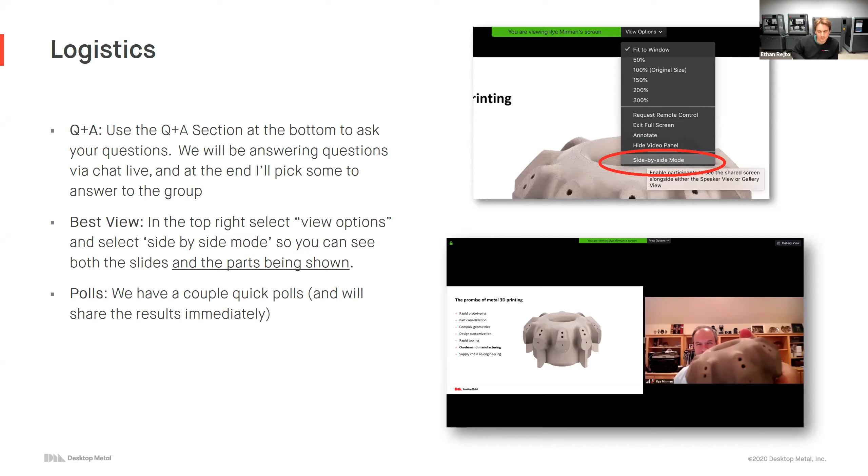Today we're going to be talking about AM versus casting. My name is Ethan. I'm a technical marketing manager here, and I'm excited to talk about this topic with you all today.

Quick agenda for today: we're going to start by looking at what some of the current challenges are in the casting industry and how additive can potentially add some solutions there. We'll talk about the transition happening in the industry from additive 1.0 to this new idea of additive 2.0. We'll look at Desktop Metal's printing technologies and how they allow for additive 2.0. We'll then look at metal 3D printing as a complement to casting, covering prototyping, pilot runs, and replacement parts. And then we'll look at metal 3D printing as a replacement for casting when talking about tooling-free manufacturing and new design features now possible at high volume. We'll also briefly look at properties of printed parts and how those compare to their casting alternatives.

Real quick, just to give me a better idea of who I'm talking to today, I'd love to do this quick poll. How are you currently making parts today? I'm sure many of you are using several different methods, but I'm curious to hear how you're making metal parts today. Hopefully lots of you say casting, considering this is a webinar for casting, but I'm curious what manufacturing methods you're using today. We have over 200 people on the line today, so we should get a pretty good distribution of how people are making parts.

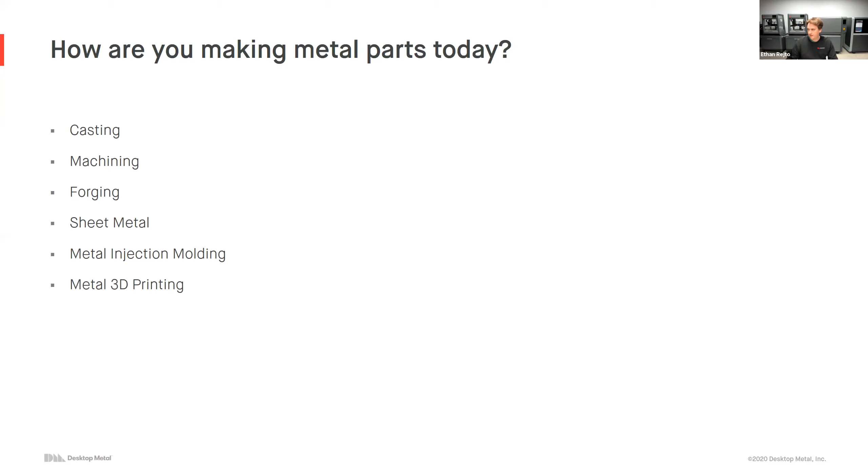Let's go ahead and get started. So, casting. Casting is a very popular manufacturing method. It's great for complex shapes that are generally difficult or uneconomical to make with other methods. It's also great because it can be used across a wide variety of volumes, from low volume with sand casting and investment casting, all the way up to very high volume die casting operations producing millions of parts per year. You can see on the screen it's great for these very complex shapes with organic curvature and a variety of different geometries.

Of course, we do consider casting a traditional manufacturing method, and it carries some challenges with it. Whenever we're talking to a foundry or a customer doing lots of casting, we hear the same challenges coming up over and over again: long lead times, generally 8 to 14 weeks to get parts back from the foundry due to tooling lead times. Associated with that tooling are very large non-recurring engineering costs, both in the design of that tooling as well as the fabrication. And sometimes it's just the design of the entire process, from your actual drawing to the end-use part, that may have to go through casting as well as post-processing.

Also, it's a very industrial process, so I'd be surprised if you're not a foundry — it's not very common for you to be doing casting in-house, which means you have to put your trust in the hands of this third-party foundry you're using.

The result of these challenges is you're generally seeing months to bring up a production line. From the day the PO is signed with the foundry to when you start getting parts back in-house, you're seeing months in between, with a very long lead time.

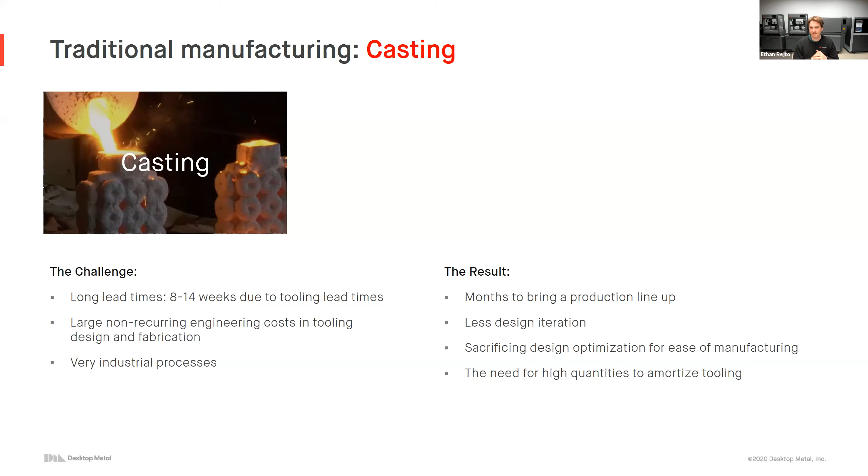While today we're talking about casting, these challenges are really true for a wide variety of traditional manufacturing methods, from volume machining to powder metallurgy like press and sinter and MIM applications.

We're seeing very similar challenges and very similar results with these methods: months to bring up production lines, far less design iteration, and of course the sacrificing of design optimization to allow for ease of manufacturing via traditional methods.

Today we're going to be talking about how metal 3D printing can alleviate some of these challenges, and what some of the results are from doing that.

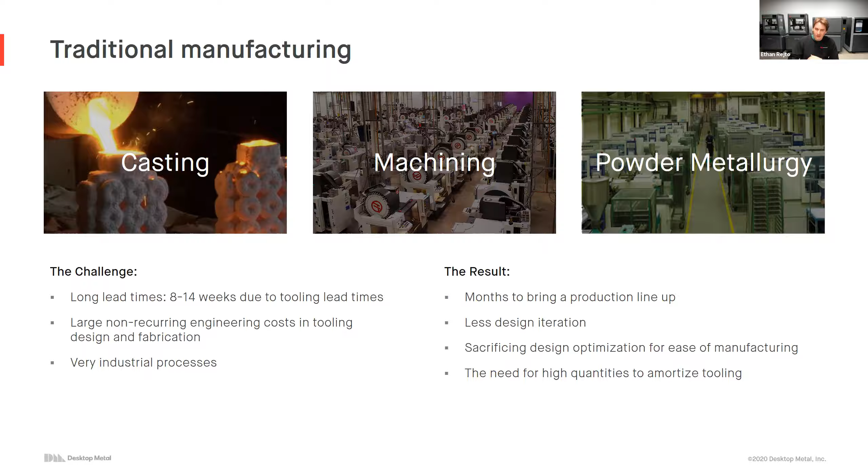We're going to split this presentation into two different sections. The first section is going to be metal 3D printing as a complement to casting.

Of course, metal 3D printing is not going to completely eliminate the casting industry, an industry that's been around for hundreds of years just because we have some new metal 3D printers. For many parts it'll still make sense to cast them, but metal 3D printing can still add lots of value as a complement to that traditional method.

But for a wide variety of parts, it will make sense to actually replace the casting method with metal 3D printing, depending on the geometry and the volumes. So the second section of this presentation, we'll be talking about metal 3D printing as a replacement to that traditional casting method.

As we're talking about that complement to casting, we're more talking about low volume applications: replacement parts for parts that were traditionally cast, pilot runs for when you're in the product design stage, and maybe some specialized orders where you can't justify producing parts via the casting method.

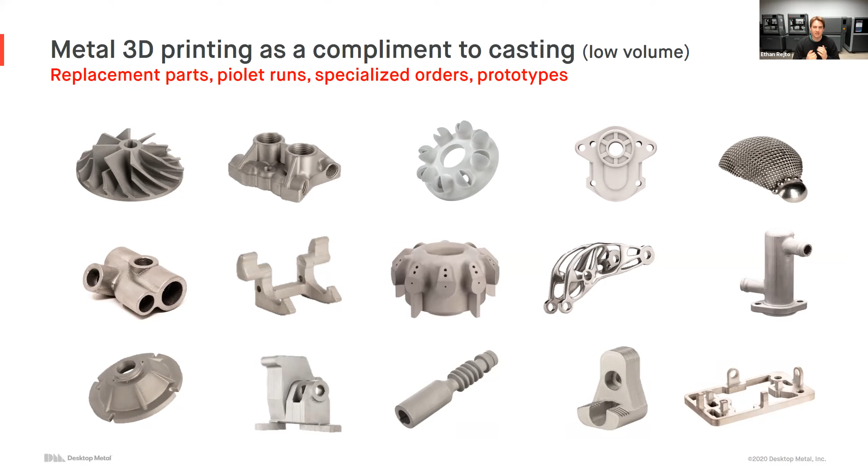And of course, that prototyping stage, where you haven't invested in tooling yet, you haven't done the NRE costs to produce those parts via casting, but you want to produce them in metal—we're seeing lots of value with metal 3D printing as a complement to casting.

When we talk about metal 3D printing as a replacement to casting, we're more talking about high volume, and the ability to mass produce parts via binder jetting. We'll briefly talk about how binder jetting works and how it allows for high volume production.

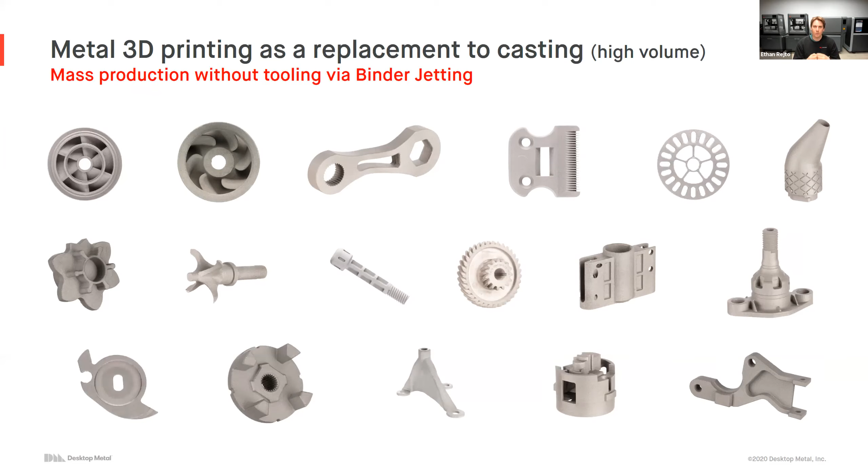But for many part geometries we're going to look at today, you actually see them being replaced with metal 3D printing because of this great benefit: the ability to produce parts in high volume without the need for any tooling.

Before we jump into the desktop metal products, I briefly want to talk about this concept of moving from metal additive 1.0 to metal additive 2.0.

Metal additive 1.0 really revolved around laser powder bed fusion machines, which produce parts with a laser scanning on top of a layer of metal powder.

We like to make this comparison: these laser powder metal 3D printers are very similar to what a 1970s punch card computer looked like.

They were these very, very large machines. They took up entire rooms. They had these highly trained special operators that you would submit your jobs to, and a few weeks later they would bring you back the results.

That's really how we feel laser powder metal 3D printers are today—they're stored away in the back rooms of your office buildings or your labs.

They have these highly specialized facilities with ventilation and explosion-proof rooms, and highly trained operators who find it very difficult to run these machines. To the everyday engineer, to the everyday designer, this technology is really not accessible. It's not at your fingertips.

So this is really how we feel laser powder metal 3D printers are today, and these challenges really led to a variety of limited applications. These revolved around applications that could justify the very high part costs and slow processing times. Generally, they were very specialized, not cost sensitive, and almost always produced in low volume. You saw many applications of powder bed fusion machines in aerospace and medical devices, mostly because they could stomach these very high part costs, and the quantities were almost always low volume.

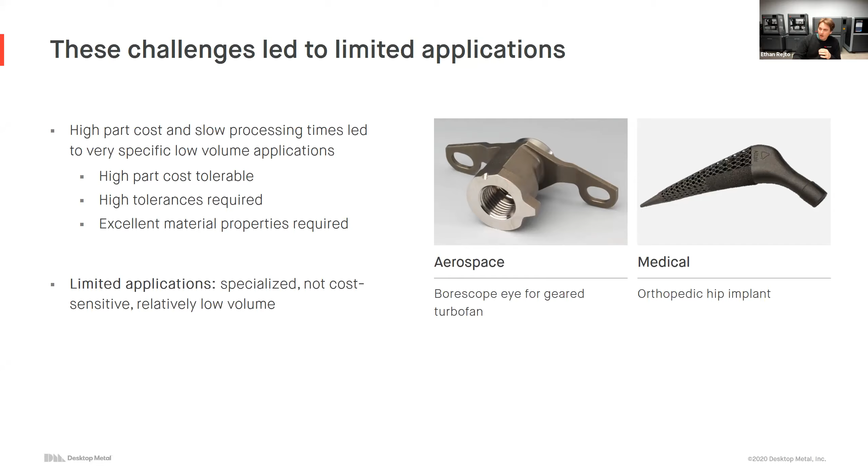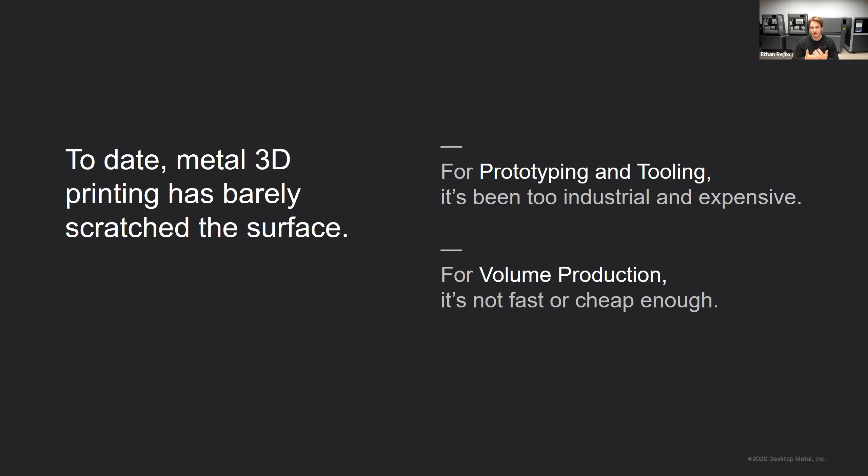Here at Desktop Metal, though, we feel that metal 3D printing has barely scratched the surface of what's possible. For prototyping and tooling, generally it's been too industrial and too expensive a process to justify. And when it comes to volume production, it's just not fast enough or cheap enough to justify producing these parts in volume. But this additive manufacturing industry is really at an inflection point where it's time to move on to the next stage of additive manufacturing.

It's what at Desktop Metal we're calling this idea of additive manufacturing 2.0. Additive manufacturing 2.0 is going to be producing repeatable, high volume, cost competitive solutions that have the finish, accuracy, properties, low cost, and speed that's similar, comparable, or exceeding that of traditional manufacturing methods.

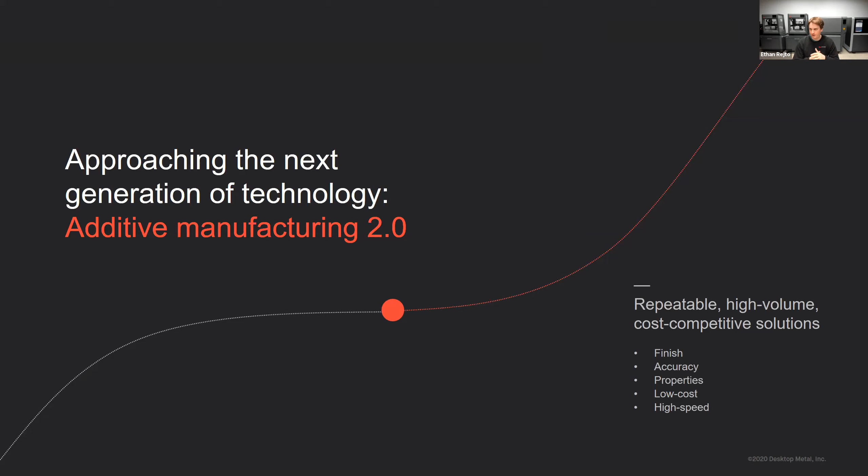This idea of additive manufacturing 2.0 is really driven by two main themes. The first being accessibility. These systems are becoming far more accessible for the everyday engineer, for the everyday designer to get their hands on. So now parts that may have been too expensive or too difficult to print before can now be justified thanks to these lower cost, accessible, easy to use 3D printing technologies.

A lot of the parts we're going to look at today have somewhat complicated geometry. It's not absurd to think you could easily machine this component, but in many applications, it makes more sense to simply throw it on the printer, and in a few days you have your part, rather than having to design your fixturing as well as the CAM programming to actually produce this part via machining.

The second side of this is the idea of high volume manufacturing. Metal 3D printing used to be a very niche manufacturing process, only used to produce maybe one or a handful of parts for very specialized applications like we talked about. Today, we're starting to see that really accelerate into higher volumes, where you can now print hundreds or thousands of parts per day, where you can actually go to market in metal with metal 3D printing. We're going to look at a ton of examples of that today, especially with how that compares to casting.

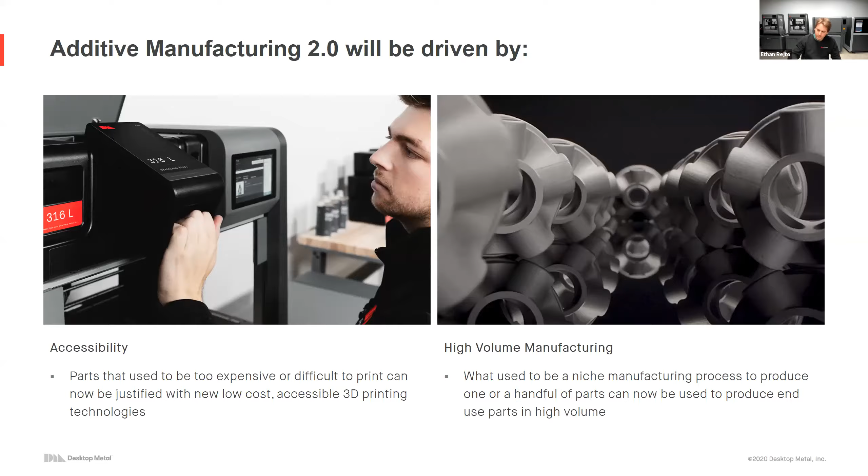To introduce Desktop Metal and how we're making this mission possible: our mission is to make these industrial grade 3D printers accessible to all engineers, designers, and manufacturers. Our promise is to produce printers that are cost competitive, high speed, and have the exceptional quality 3D printing that you need and expect for your end use applications.

To date, we have 4 metal 3D printers, and our solutions are designed to compete with traditional manufacturing at any scale and any level of complexity.

On the bottom here, you see the Studio System, which you can see just over my shoulder here to my right. The Studio System is great for prototypes and one-off parts. It's very easy to use, it's a very safe system, and it does a great job of competing with machining and laser powder bed fusion for these prototypes and one-off parts.

We're going to look at a bunch of examples and how that compares to the casting industry, and where the Studio System is adding value there.

When we want to move to higher volume, we're going to be talking about the binder jetting systems at Desktop Metal. These systems, you can see the Shop System just over my shoulder here to the left, really allow for much higher volume, producing hundreds or thousands of parts per day, over millions of parts per year with the Production System, really designed to compete with traditional manufacturing methods when it comes to volume.

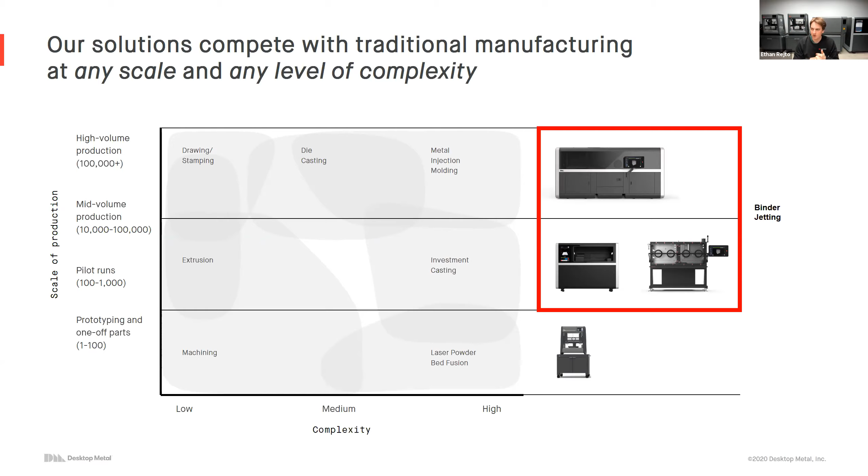So how do these systems work? At Desktop Metal, we chose to design our printing systems around the chemistry and supply chain of metal injection molding.

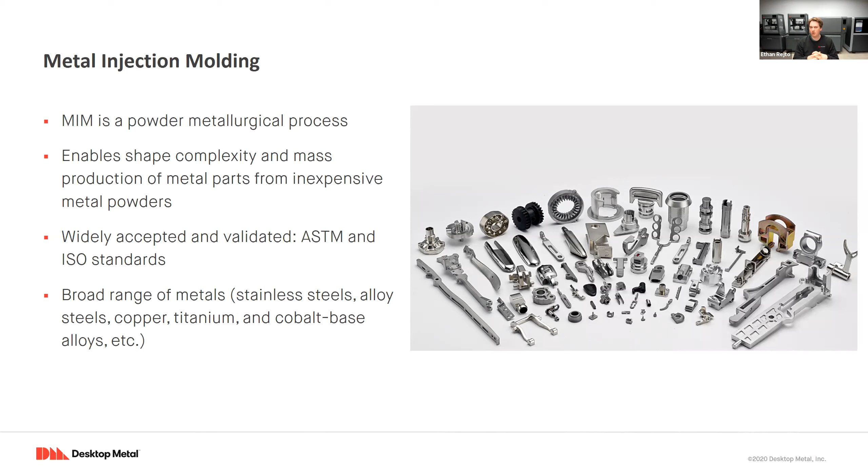I saw when we did our poll that some users were familiar with metal injection molding and are using it today to produce parts. But for those of you that are not, metal injection molding is a powdered metal process that enables you to create very complex shapes and then mass produce them utilizing inexpensive metal powders. It has widely accepted standards, both ASTM and ISO, and a broad range of materials available, from stainless steels to even titanium and copper. It's used across a wide variety of industries, everything from automotive to the firearm industry, even the medical device industry, to produce these beautiful parts in very high volumes utilizing these inexpensive metal powders.

These powders enable you to create complex parts with excellent metallurgical properties. If you look at our chart here, you can see that top L shape showing what a wrought material would get in terms of ultimate strength as well as elongation. And just below that is our powdered metal MIM parts, which still have excellent material properties and really fall just below that of a wrought material.

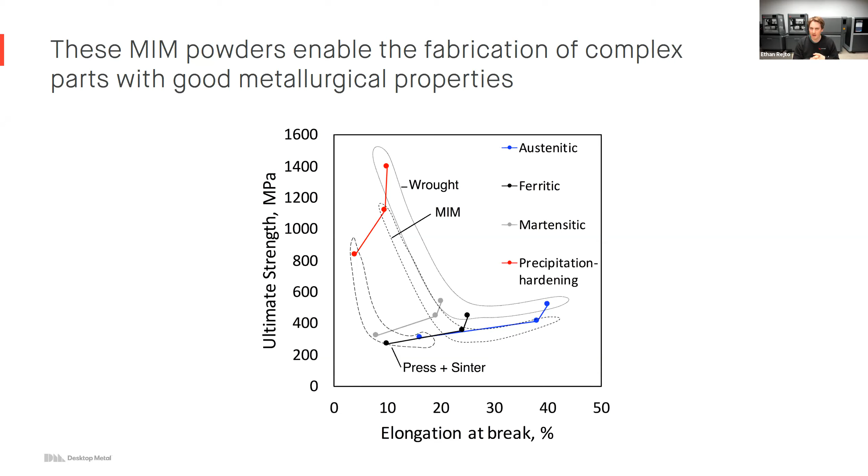How does this process actually work? You start by mixing a metal powder, that low-cost metal powder we talked about, with a binder into a feedstock. You're then going to inject this feedstock into a mold the same way you would in a plastic injection molding process to create what we call a green part. That green part is still that combination of metal powder and binder. It's quite fragile, you could break it with your hands, but the part has taken its shape. It has metal powder and still has that binder to glue material holding it together.

From there, we put it into the debinding system. That's a solvent wash. It's going to remove most of the binder out of your part, and then you put it into the furnace. The furnace is going to get just below the melting temperature of the material, and it's going to sinter and remove that last bit of binder from your part, actually sintering your part into a dense, strong metal part. Sintering is a process that allows you to fuse your metal particles without actually melting them.

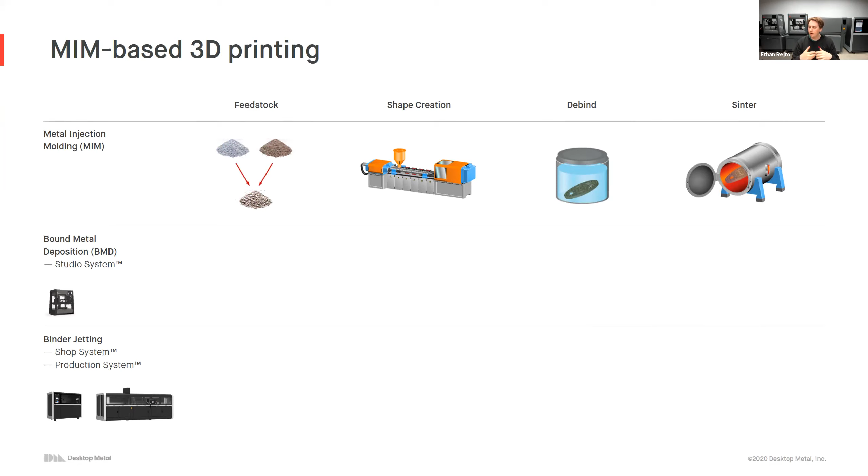So how do our systems compare to this process? Of course, with MIM, like we just mentioned, you have those 4 steps, but what's the main challenge with this MIM step? The tooling, of course. With this process, for each different geometry you want to make, you're going to need a different expensive mold that's going to be the shape of your part. Of course, we utilize these same materials, but we remove that tooling step.

When looking at the Studio System, rather than having this loose metal powder, we create our feedstock in a rod. This rod is extruded through the nozzle of the printer. We're going to build up the part layer by layer to create the same thing that would come out of the mold, what we call a green part. Again, this is that combination of metal powder and polymer binder. It's pretty fragile, if I drop this it would break. But here we have our general shape of the part with that metal powder held together with that binder material.

After that, we're going to put it in the furnace. You can see the furnace directly here behind me. That furnace is going to remove that binder material. The part's going to shrink about 20%, and we're going to end up with a dense, strong metal part here. Hopefully you can hear that.

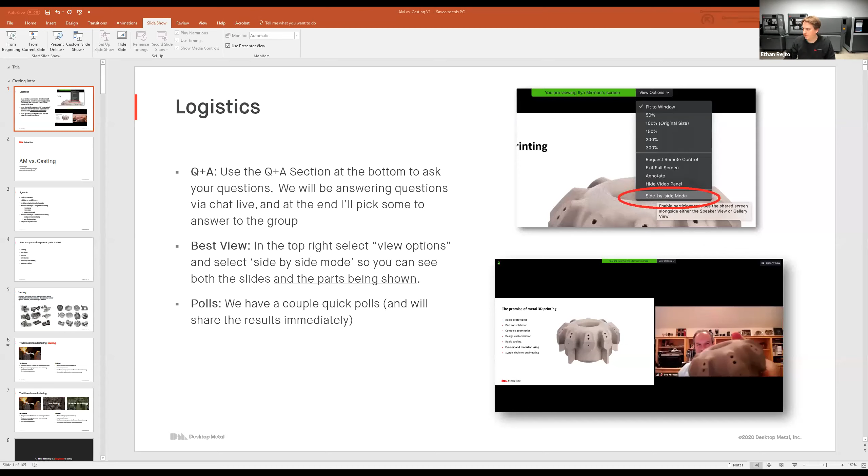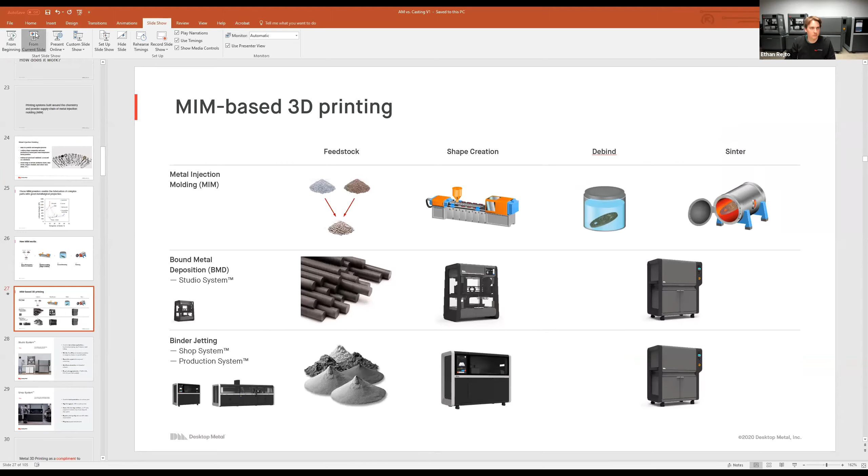Oh, for some reason I just lost my screen. One moment, that's strange. My monitor turned off for some reason. Oh, one second. Sorry about that, folks. Sorry about that, not sure why that happened. Okay Nick, does everything look okay now? Sorry about that everybody, for some reason my monitor decided to switch off. All good, okay, sorry about that.

Anyways, so after that sintering step, we end up with our dense, strong metal part like you see here. Now we have a dense, strong metal material, but of course we've been able to remove that tooling step. We don't need a different mold for each part we want to create. If I want to print this today and I want to print this pulley tomorrow, all I have to do is upload a different file and hit print on the printer.

When it comes to the binder jetting machines, we use the same metal powders that we're using in the Studio System and metal injection molding, but now we're actually jetting our binder onto that metal powder layer.

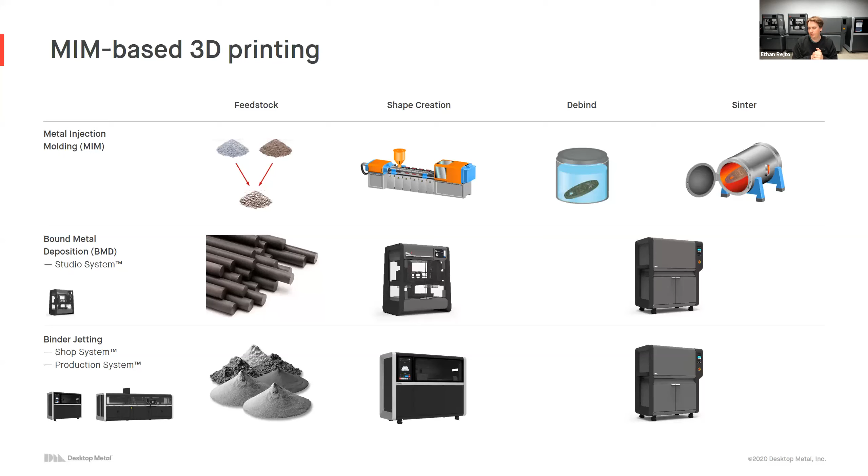We're producing hundreds of parts per day because we're able to jet binder over that entire area-wide bed. We'll look at some animations later that make this a little more clear. After the printing step, we put the parts into the furnace, but now we're able to print hundreds of parts at a time in these large batches.

So a quick review of the benefits here. The Studio System was really the world's first office-friendly machine. My desk is right across the room here, I sit across from this machine all day long and print parts all day long. It's great for low volume applications, prototypes, jigs and fixtures, tooling. Very safe for the office, you're never exposed to any powders because we're using these rod materials. We have a very easy separable support process that allows your supports to easily come off the part. Easy automation, the software walks you through the whole process, and it's easy to change materials. The materials come in cartridge systems that swap in and out the same way you would an inkjet printer, allowing for very easy material changes.

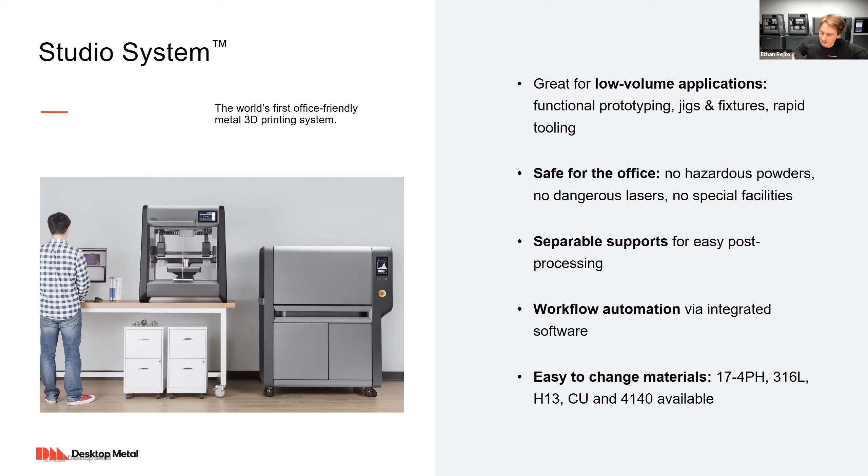The Shop System, the other machine you can see over my shoulder here, is really the world's first binder jetting system designed specifically for machine shops. It's great for batch production of end-use parts, with very high throughput of hundreds of parts per day, while still being very accessible. We provide everything you need to get up and running with the Shop System. It has very high print quality and produces fully dense, isotropic parts that are great for end-use applications where you need those great material properties.

That's a little introduction to Desktop Metal and to this idea of Additive 2.0. Now let's look at a bunch of examples, starting with our two main themes, beginning with this idea of metal 3D printing as a complement to casting.

The first thing we'll talk about is using metal 3D printing for prototyping and pilot runs. With either of these machines, here we're mostly talking about the Studio System, you're able to print functional metal parts quickly and affordably during the development stage. You can also print batches of parts to validate the design across multiple units before placing a casting order, before investing in non-recurring engineering time, and waiting the 12 to 14 weeks to get your parts back from the foundry.

These parts can now be tested under high loading, high heat, even corrosion environments, where we're no longer just printing parts to test form and fit, like we would with PLA or ABS plastic to check if it fits in our machine. Now we can actually run these parts under high heat and loading and corrosion environments to understand if they actually perform before we move to a casting environment.

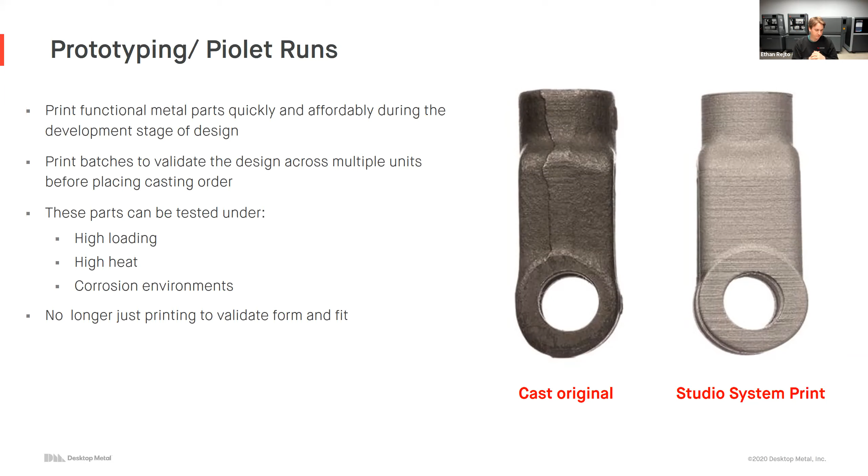The first parts we'll look at are from a worm gear speed reducer, a very common machine design component used to either increase speed or increase torque. The first part I have here was printed on the Studio System in 4140 steel. It's a very common mechanical component, and I'm sure many of the engineers here recognize this worm gear component. Eventually this part is going to be produced via casting, followed by a hobbing operation.

With the Studio System, we're able to test a couple of different designs. We can vary the pitch, we can vary the dimensions of these teeth, to understand how this part is going to perform before we move to higher volume applications. So I printed a wide variety of these, all on the Studio System, so we can test these parts functionally before moving to the casting and hobbing stages.

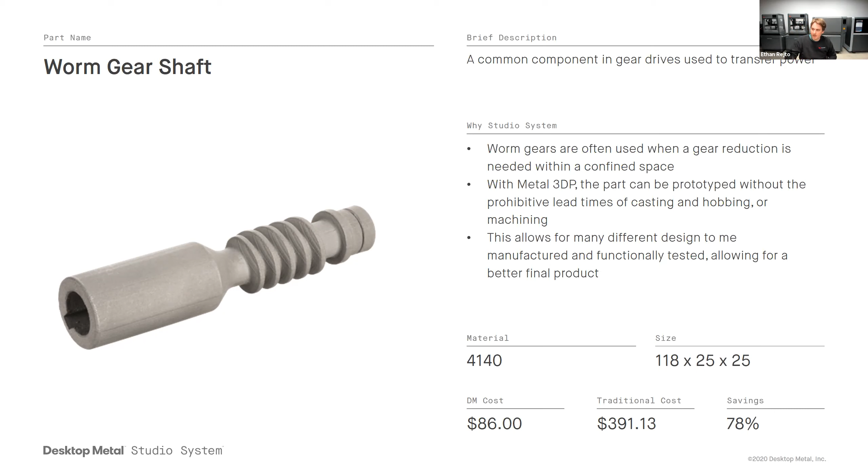On the Studio System, this part can be printed for just $86, compared to outsourcing for a machining prototype, which would cost over $390. So there's the ability to produce this in-house, with both cost savings as well as accessibility and lead time savings from being able to produce this part. From that same assembly, there's also this front mounting flange, which is another great example of a part that's eventually going to be cast.

They're going to mount your motor or output shaft to this flange in your worm gear reducer. But before moving to the casting stage, we want to print this part to prototype it, understand how it's going to perform, and have a functional part to test. We may want to print this in multiple geometries with different ribbing and hole patterns to allow for different motors and outputs.

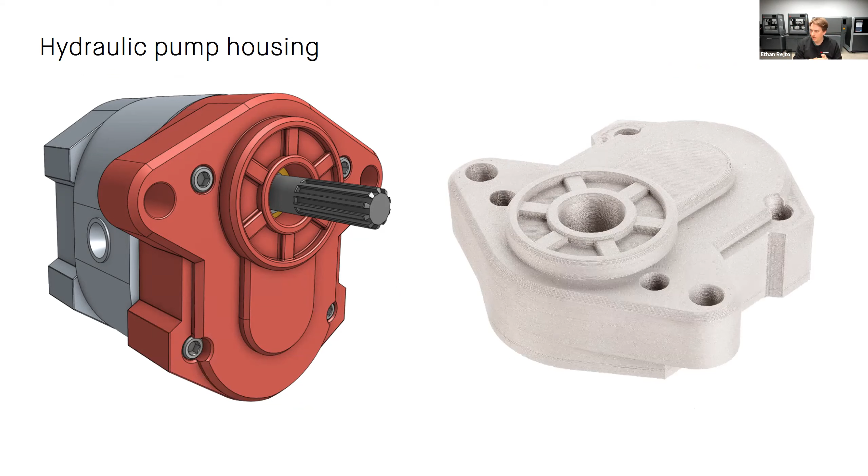Another pump housing, another example of a part that's going to be cast in high volumes once we finalize the design. You can see it's the front housing of that pump, part of a hydraulic pump. When produced in high volume, this part's going to be cast, followed by some secondary machining operations.

But by printing this part, we're able to avoid the long lead times of casting if we were to produce the prototypes via casting, as well as the lead times of machining, both from our internal shop and from having to go out of house to have this part produced.

It can be produced for just $228. To outsource this part for machining was going to be over $710. So just another great example of a geometry for when we are going to move to casting that we can now quickly print for our prototype.

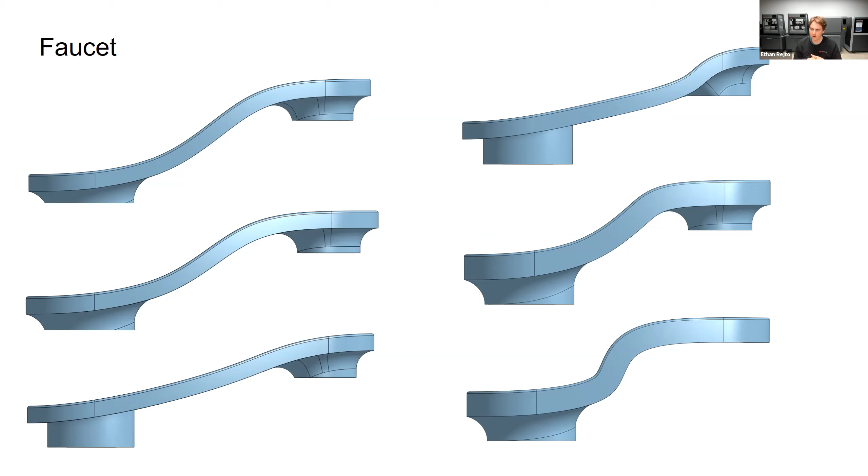Faucets. We work with a variety of different faucet manufacturers that are always looking to iterate and test different designs before they move to high volume production. They want to actually install these parts and understand how they look and perform before moving to higher volumes via casting or other manufacturing methods. You can see a great example of a part here that's been printed.

It's then been polished - of course, these parts after they come out of the furnace are metal and fully compatible with your traditional finishing operations. This has had an isotropic super finishing done to it with some chemicals and an abrasive media to give it that nice shine, allowing it to be tested to see if this is the part we want to go to high volumes with.

Another example here is this gear. This is part of a crankshaft gear assembly. This part actually attaches that crankshaft in a motorcycle engine to the water pump, as well as the oil pump, to drive those two pumps off the main power of that crankshaft.

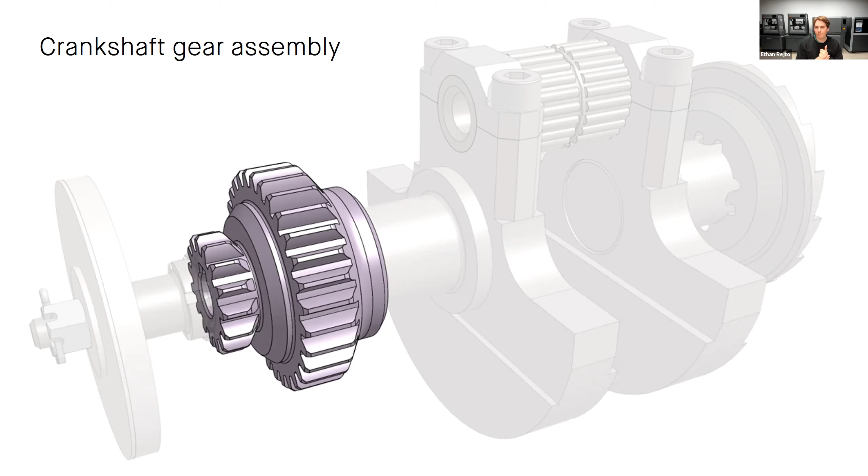This is actually a good example of assembly consolidation. This part was originally manufactured as two different separate gears that were then welded together. But with 3D printing, we're able to consolidate those two gears into one part and print this geometry all together as one.

Very easy to prototype this component on the Studio System. Then when you move to production with casting, followed by gear hobbing, similar to the last gearing we were looking at, we've already validated our design. We've already functionally tested it in high heat, corrosion, high loading environments, running this part at high speeds to understand that this is the geometry we want to move to mass production with.

Some pumping components, valve bodies, similar to the pump housing we were looking at earlier. Valve bodies are a quite common cast component, but before we actually move to the casting stage, it's beneficial to be able to prototype these parts.

This part's part of a valve body for a block and bleed valve. It has some channels that would be very difficult to machine, if not impossible. But printing this part on the Studio System, you can print it in just a couple of days in 316L to give it that nice mechanical and corrosion properties from that stainless steel, in just a few days before moving to these higher volumes of casting.

Again, produced for just $88 in just a couple of days.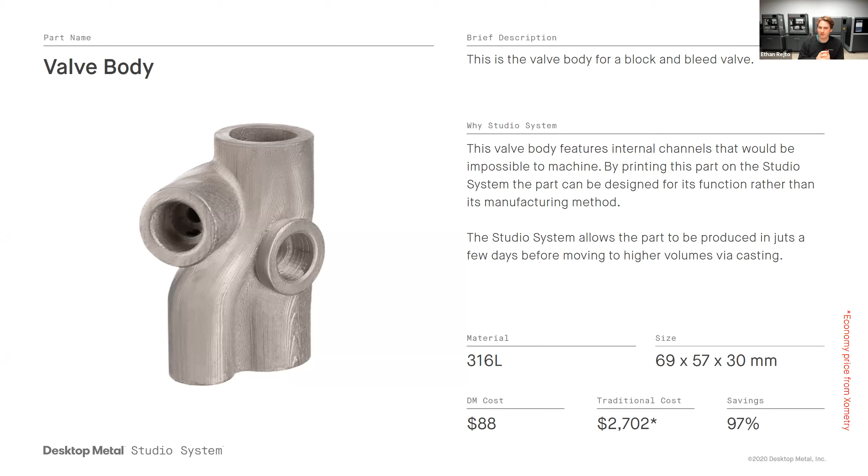So just trying to give everyone a bunch of examples here to give you a better understanding of some of the geometries that are really beneficial to print.

Looking at our first customer of the day, EWOL. They are a manufacturer of high-tech marine propellers, located in Milan, Italy. Founded in 1997, they produce these propellers as well as propeller components for very high-end sailing yachts, using a wide variety of stainless steels to give excellent mechanical performance and corrosion resistance. Of course, a lot of these parts are in the water, exposed to seawater, salt water, so they want that excellent corrosion resistance.

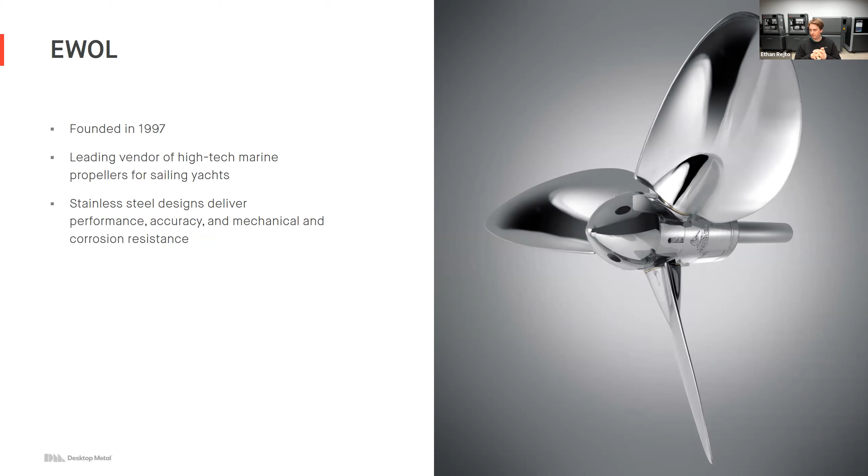The first part we're going to look at is this propeller pinion. This part connects the propeller shaft to the actual blades. The goal for EWOL was to streamline their manufacturing. Traditionally they were making this part via an investment casting process in 17-4 stainless steel, but it was coming with lots of hassles and logistical issues. So the project goal was to overcome the investment casting manufacturing constraints and produce a part they could actually move into end use parts with.

The first issue they really faced was this casting lot size issue. I'm sure many of you, whenever talking to a customer who's casting parts, hear about this issue of lot size, where they have to place a minimum size order, otherwise they can't justify it or the part costs are too high. For them, that was 100 pieces. If they weren't ordering a minimum of 100 pieces, the part cost was too high or the foundry wasn't willing to do it at all.

On top of that, even after they'd collected enough components, there was a very long lead time associated with these parts. Of course, investment casting has this alloy procurement, wax pattern setup - it's just a relatively long process. So even after they placed the order, there was quite a long lead time.

When the parts came back from the foundry, they still required challenging, labor-intensive CNC machining operations. They had to machine these inner ribs and the bottom coupling component, and the cutting tool needed to go deep inside the inner diameter of the part with limited access.

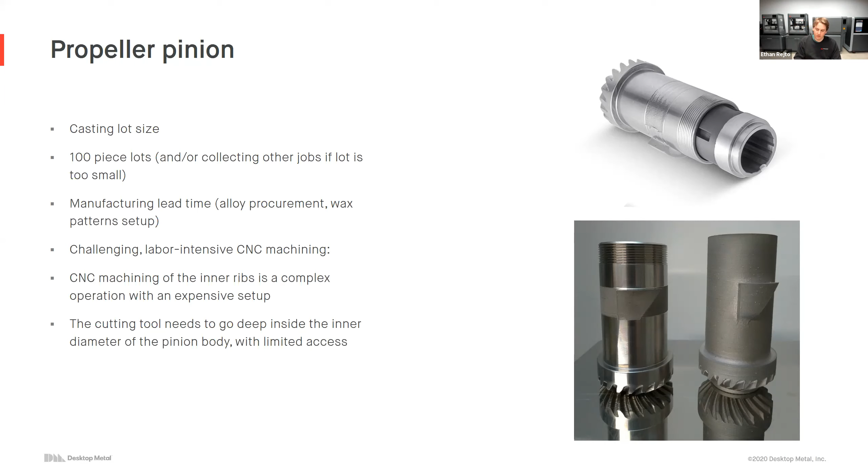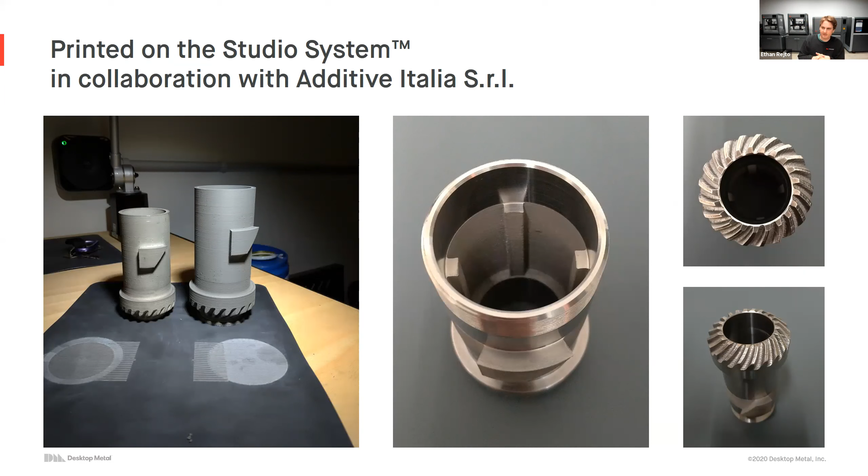So what did they do? They took their model and started printing them on the Studio System. You can see on the right side of that left image the part that's come right off the printer, and on the left is the part after sintering, with that strong, dense stainless steel material. They still had to do a little bit of post machining to the component, but these parts perform the same way when machining as a raw material would, very similarly.

But with printing on the Studio System, there were big business impacts for EWOL. They're able to be much more responsive to customer demands because they're not waiting on the foundry. As soon as an order comes in, they can load it on the printer, print the part in a couple of days, and send it out. They're finding it a much faster manufacturing process with reduced health hazards, since it's a very safe and easy to use process, and less demanding in terms of logistics because they don't have this lot size constraint. They're able to lower part cost and improve part quality compared to their investment casting alternative. It's also a much less labor intensive and more sustainable process than casting, which was important to them.

So big business impacts for EWOL - this ability to produce complex geometries for improved performance and manufacturability when it comes to replacement parts and prototypes. This project really demonstrated the feasibility of additive manufacturing as a truly viable manufacturing method in terms of speed, flexibility, quality, and cost, to be considered across a wide variety of their other parts.

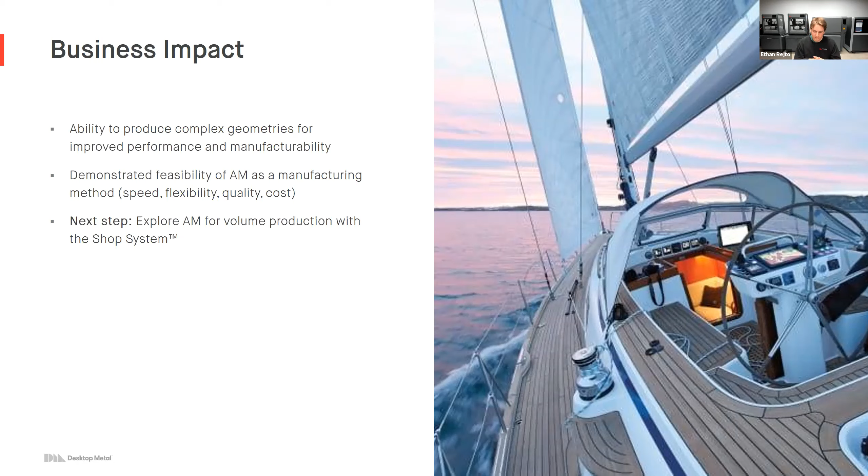The next step for them is to explore what we're going to be talking about in the next section, which is moving to volume production with high volume parts via binder jetting, specifically with the Shop System, where they want to try to eliminate this casting process altogether and just print these parts in high volume via binder jetting. The next section is talking about replacement parts.

Many parts have these lifetime service agreements where companies have to either warehouse components, keep manufacturing lines up and running, or find alternative manufacturing methods to ensure that their customers always have replacement parts when and where they need them.

Many industrial machines come with lifetime agreements that whenever they need replacement parts, those parts are going to be available for them. 3D printing is an excellent alternative for producing these parts because now we can do what's called a digital warehouse or digital inventory. I can keep a simple file on my computer, and whenever that part's needed, I can load it onto the printer, and in a couple of days I have my end-use part ready to go, ready to ship out, ready to get deployed in the field.

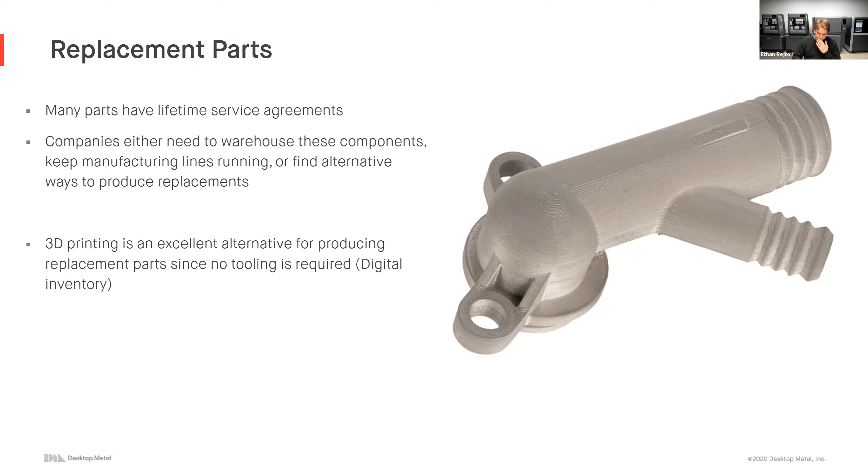This is a brake housing. It's used to integrate multiple different moving components on an excavator machine. At one time this part was produced in very high quantities, but it's no longer in production. There's still a small trickle of needed replacement parts for those people who are still using machines that operate this part. In those cases it's far more affordable to produce this part with 3D printing than to keep that manufacturing line up and running.

This part was produced in 4140. It's one of the early parts we produced here at Desktop Metal. If you've been around for a while, you've probably seen this geometry before. It has a little bit of oxidation on it just because this is a 4140 low alloy steel component. But it's a great example of a replacement part where when the customer needs it, we throw it on the printer.

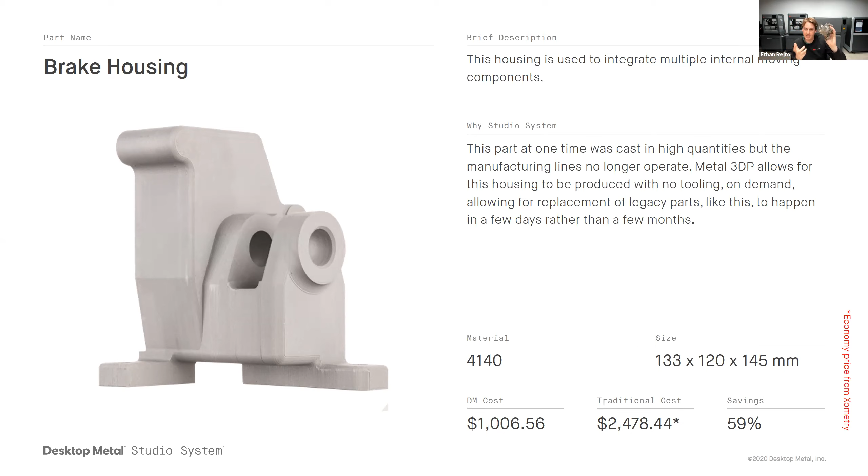In a couple of days, we're ready to ship it out into the field. We can print this part for about $1,000. It is quite a large geometry, but to outsource this part for machining is going to be over $2,400. So still a huge savings, as well as a time and logistical savings of being able to print it on our own machine rather than having to go out of house.

Looking at another customer who's making use of printing for these replacement parts is this company, Master Drilling. They're located down in Johannesburg, South Africa, and they are a manufacturer of these very large earth drilling machines. They drill miles into the ground, mostly for mining operations, oil and gas operations, and they produce these very large machines to do the actual drilling.

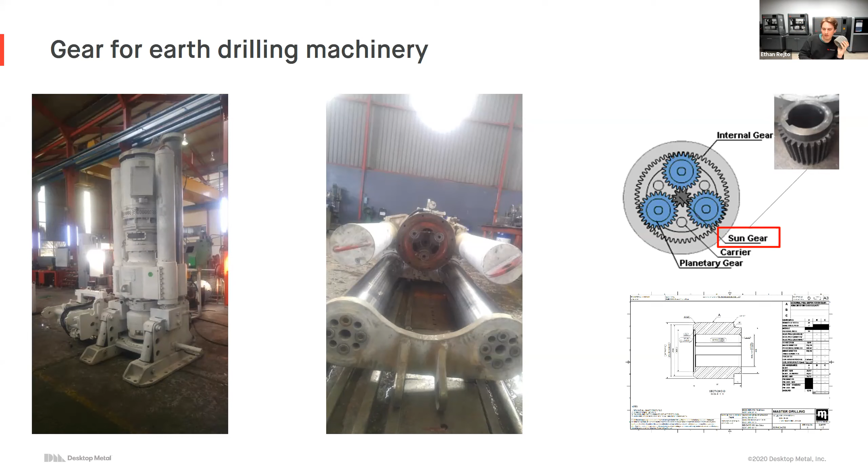The part we're going to be talking about today is this sun gear. This sun gear is the sun gear of this planetary gear set. It's used to attach this very large motor that you see. It goes through the planetary set, and then of course to the actual drill bit that's doing the drilling miles into the ground. You can see it actually being installed here.

You can see the part that they printed here. Unfortunately, with their original part, they were casting it in a foundry in China. When they had one of these parts break, they found they had a 3-month lead time to get this part replaced from the Chinese foundry. Of course, they did not want to have their drill down for 3 months, so they were looking for an alternative. How do we get this drill back up and running as fast as possible?

By switching over to the Studio System, they were able to print this part in just 3 weeks. So what did that 3 weeks entail? It entailed printing this part. It did have to go through a debinding step because it was using an earlier version of the Studio System. They then sintered this part in the furnace. They did a case hardening operation to bring up that hardness value on those teeth to ensure it had a long lifetime. And then they did some post machining to ensure it was hitting all the critical dimensions they needed. It's quite a big part.

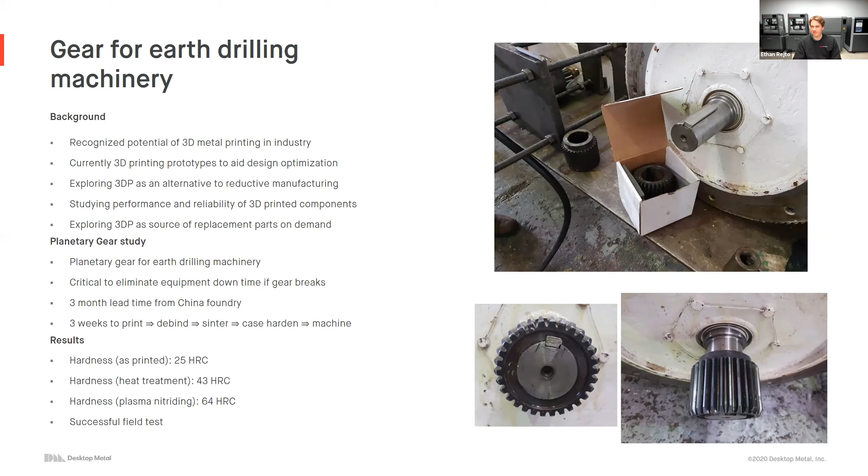You can see the results there on the bottom: after printing, they had about a 25 Rockwell. After the first heat treatment process, they got up to 43. And then after plasma nitriding, which really helps increase that hardness on the surface, all the way up to 64. A great example of a part that was originally cast and needed a replacement. So what did they do? They went to their Studio System and were able to produce a part, going from 3 months down to just 3 weeks. This next part here is a thermostat housing.

Sorry, I lost my monitor again. You can still see your slides if you want to keep going. Yeah, I just don't see them. It's all right.

So I could do it without the slides. This is a thermostat housing, used on a vintage Mercedes-Benz engine that is no longer in production. Vintage cars are a great application—many people are still working on their cars and want their cars in production. So to replace those components, 3D printing is a great example. You can see this geometry here; in this example, they actually found the original part. They were able to scan this geometry, load it up onto the printer, and in a couple of days produce their part. Just jump around here.

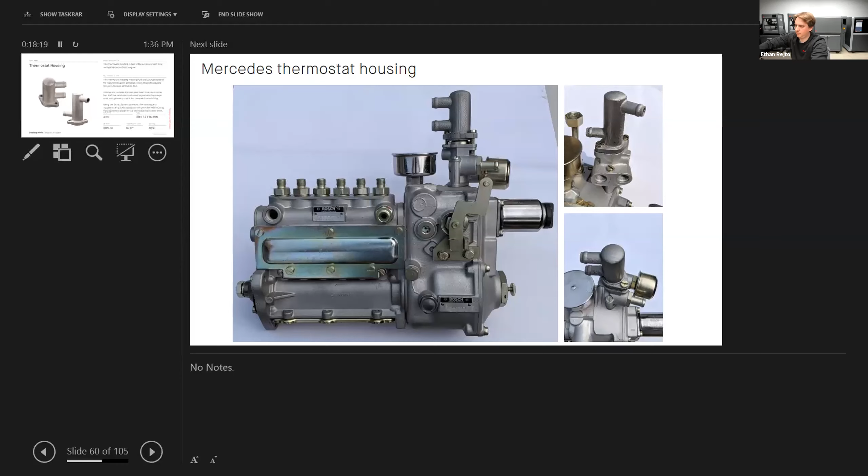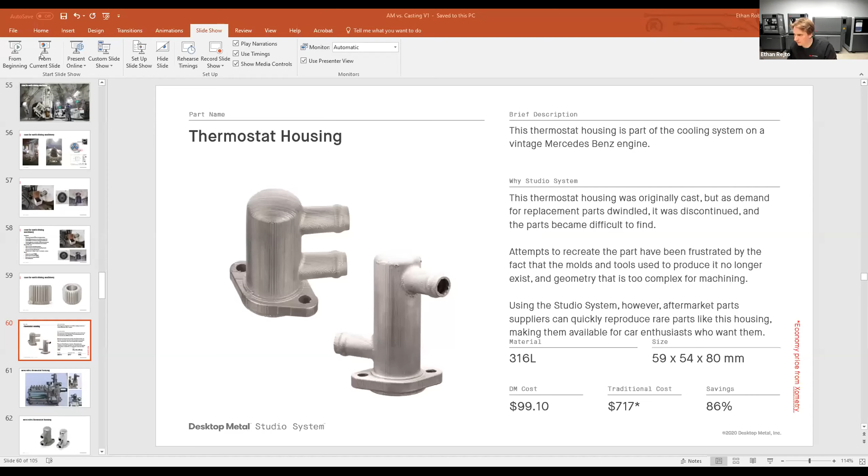I'm just gonna switch over to just my laptop. Sorry, folks, just one second. Okay dokie, sorry, I had a second monitor here, but it doesn't seem to be working. So we'll just go off just the laptop, which is fine.

Anyways, thermostat housing—again, this is part of the cooling system on a vintage Mercedes-Benz engine. The part was originally cast in high volumes many years ago, but now that supply chain has dried up. When replacements are needed, they were able to find the original part, scan the geometry, upload it to the printer, and in just a couple of days they had their part. So it's a great example of an aftermarket replacement part here.

This part was produced in 316L to give it that excellent corrosion resistance needed for those corrosion environments, because there is some steam and other corrosion fluids involved here—produced for just $99 on the Studio system. You can see a couple examples of it in context here, in that actual assembly that's going to be produced.

And then again, you can see that example of it after being polished. That was polished with this isotropic surface finishing process to give it that really nice, clean finish that some people need for those aesthetic applications.

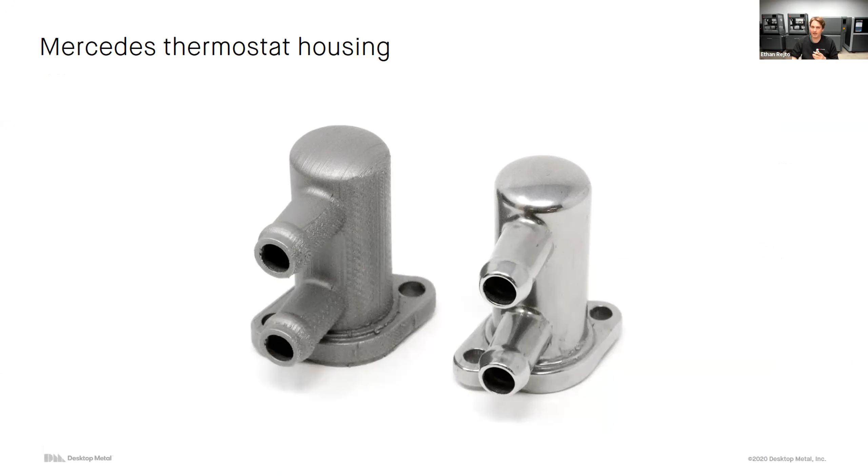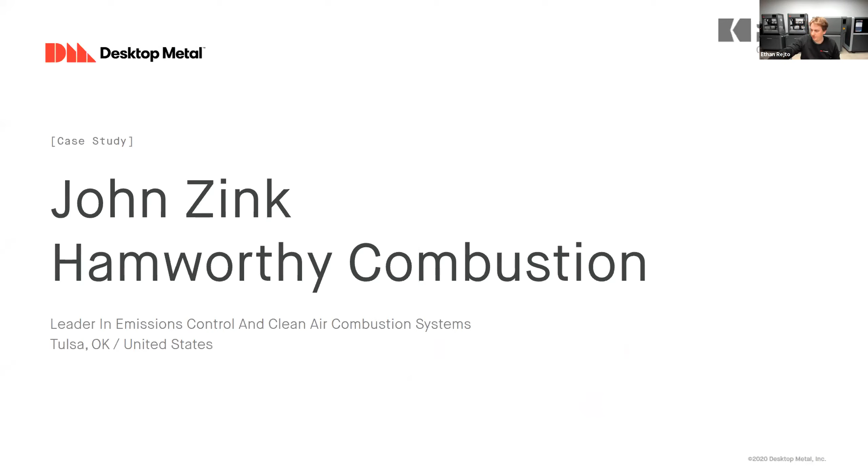The next customer we're going to be looking at is John Zink Hamworthy Combustion. They are a leader in emissions control and clean air combustion systems, located in Oklahoma here in the United States. They had this additive manufacturing initiative they wrote on in 2016, where they're really looking to increase the amount they're using additive across all of their product lines.

They were using some plastic 3D printing. They purchased a Desktop Metal Studio System and started printing parts in metal. What are they using their Studio System for? They're using it a lot on their manufacturing floor for jigs, fixtures, custom tools, and dies. Not something we're going to talk too much about today—we have other webinars covering that—but they're using it a lot for those applications.

They're also using it a lot for these urgent aftermarket orders, which is why we're talking about them today—parts that they need to produce sooner than what they could receive from their casting suppliers. So we'll look at a couple of different geometries they produced that were originally cast parts, which now they're able to produce on the Studio System.

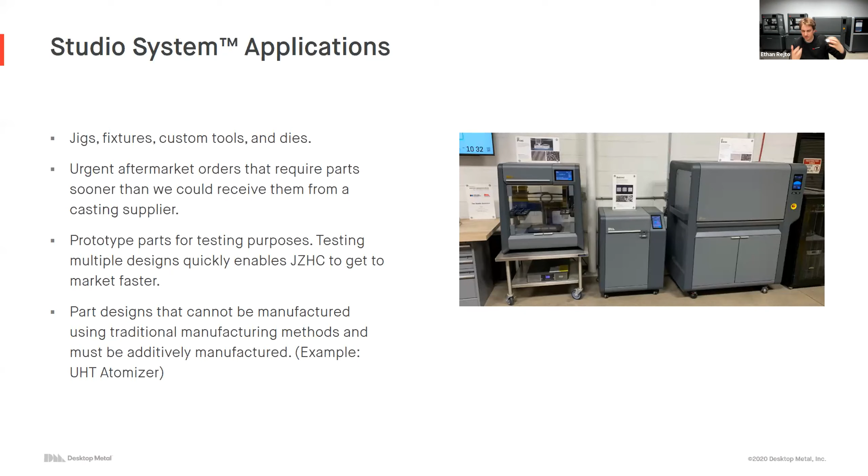They're also looking to prototype parts for testing purposes—they want to produce multiple parts very quickly to get to market faster. And they're also making use of geometries that just cannot be manufactured with traditional methods—very organic shapes as well as internal channels to increase part performance, but which just can't be produced any other way besides additive manufacturing.

First example here is some parts for the USS Blue Ridge. These parts were originally cast—they're yokes and handles for this safety shutoff device. When some replacements were needed, of course that casting line was no longer operating. What do they do? They grab their part.

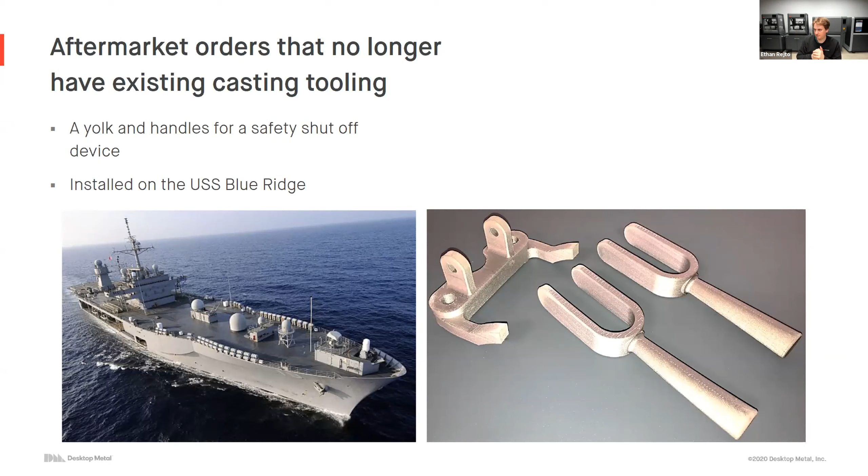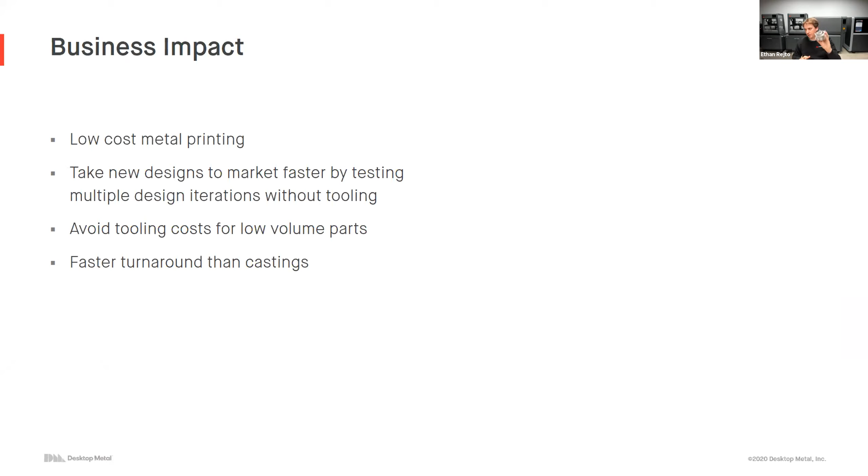So big business impact for John Zink. They introduced this low-cost metal 3D printing option that's actually able to compete with casting, compete with machining. They can take these new designs to market faster because they can test multiple different designs and iterations without tooling. They're avoiding any tooling costs for these low volume parts, and they're seeing a much faster turnaround from printing than they would from casting.

So now let's jump over to this next section, that's metal 3D printing as a replacement to casting.

The main challenge that we've already briefly talked about with casting is this idea of the ramp up. From when your drawing is approved, when the PO is approved, you're seeing very long foundry lead times and high non-recurring engineering costs. Much of this comes with the development of the process and the development of the tooling, either the mold tooling or those match plates for these casting processes. That's 8 to 14 weeks of lead time, as well as large non-recurring engineering costs. The result of this, as we mentioned earlier, is far less design iteration and far less optimization than you would want for these components.

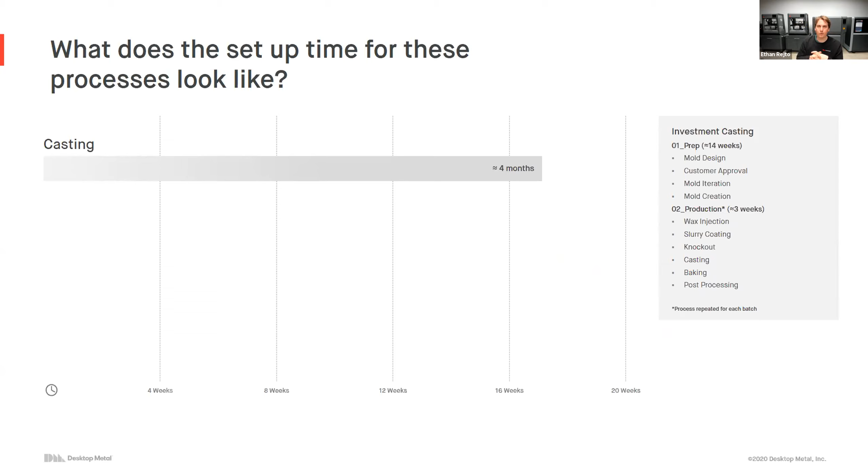So what does the setup process look like for casting? Generally it's about 4 months. For investment casting, you have to do mold design, get approval from your customer, do some iteration as well as the actual creation of that mold, which is quite a long process. With investment casting, you then have to do the injection, the slurry coating, the actual knockout, then the casting, as well as the post-processing process. All in all, you're seeing about 14 weeks of prep before any parts are actually being produced.

Now what happens if the design changes? We've already invested in this tooling, we've already invested in these molds. Now we have far longer lead times to make a simple change to our geometry. If possible, we could make some small changes to the mold, but generally we're seeing very long lead times to make any changes to our geometries when these parts are being cast.

How does this compare to a binder jetting process? In binder jetting, we see about 1 to 2 weeks to get up and running. You get your part in, maybe do some generation of some supports, do some scaling, some simulation to understand what the shrinkage of that part's going to be. You then print that part, depowder it, sinter it, and in just 1 to 2 weeks, you can produce hundreds of parts. Once you confirm those parts are adequate, coming out of the furnace the way you want them to, you can then immediately turn that machine on to start producing thousands, tens of thousands of parts per week without the need for any tooling. So of course, we're shrinking that 4-month timeline down into just 1 to 2 weeks.

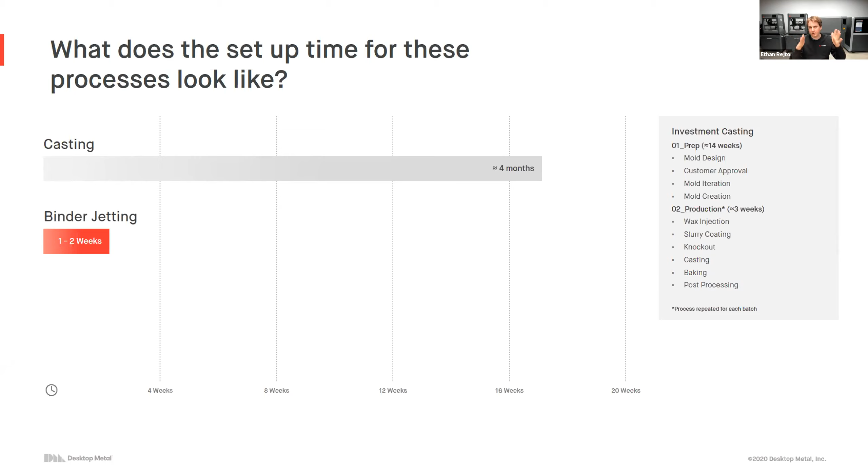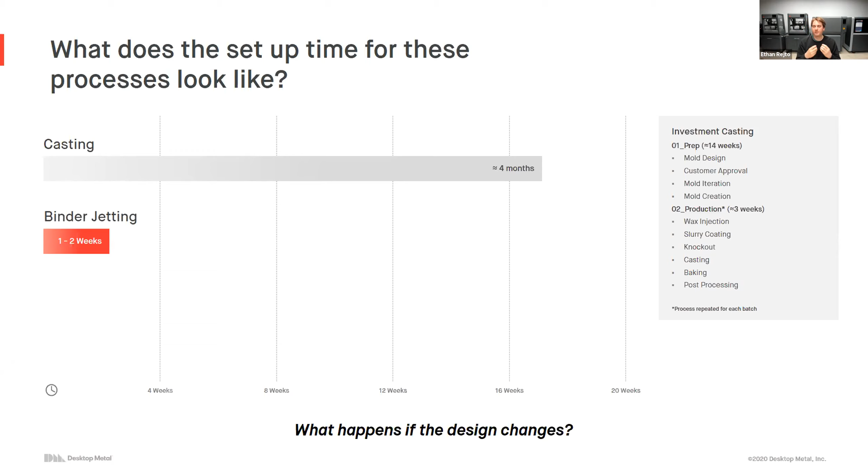Now what happens when the design changes? Let's say we want to change the diameter of a hole, or add some features to the geometry. Instead of having to go all the way back and make changes to our tooling, all I have to do is upload a new part to my binder jetting machine, and in a couple of days, I can have hundreds of that geometry in hand, allowing me to be very flexible, very agile with my manufacturing process.

What allows binder jetting to be this key technology for mass production is this ability to have very high throughput, thanks to this area-wide raster-based printing, where we're printing over the entire area of the print bed in one pass.

We're still utilizing these low-cost metal injection molding powders, thanks to this very established metal injection molding supply chain that already has this broad range of materials already being used in the metal injection molding industry.

The parts come out of the furnace with isotropic material properties because we're heating the entire part at the same time up to temperature.

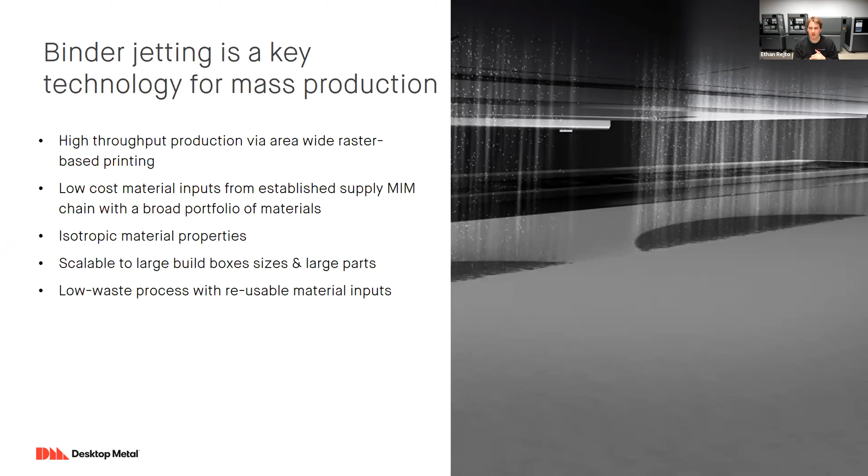We can use these very large scalable build boxes that allow us to print a wide variety of geometries at the same time, or a large quantity of the same part at the same time. And again, very low waste process because we're able to reuse any material that's not printed during the process.

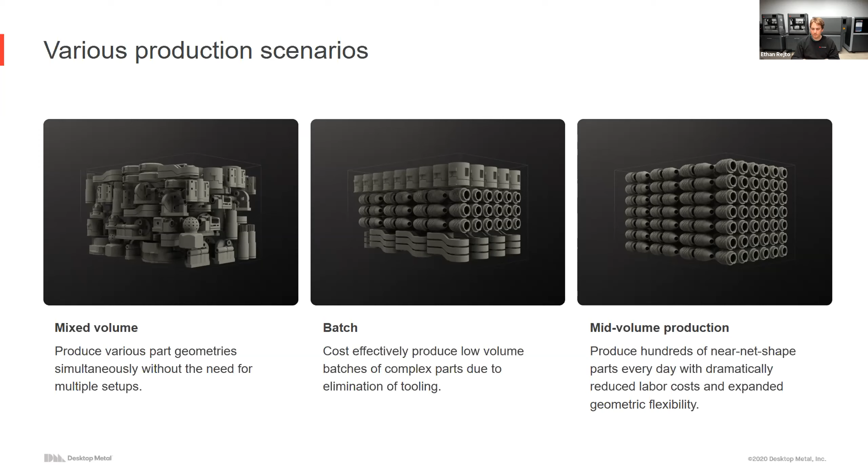This rocker arm, this is the part I have with me here. It's used for opening and closing the intake valves on an outboard boat engine. This part, to ensure it had adequate strength, needed to be produced in 316L steel, thanks to that extra corrosion resistance given by that material as well. Printing allowed us to add these ribs that were needed to add extra material to really allow us to optimize this geometry rather than just optimize it for the casting process.

You can see the cast alternative on the left there, that gray component, and then the printed part that I have with me here today. Again, this part can be printed for just $4.75 per geometry. You can do over 330 of these parts per build, over 570,000 of these parts per year. So again, really starting to compete with casting in terms of both cost as well as throughput.

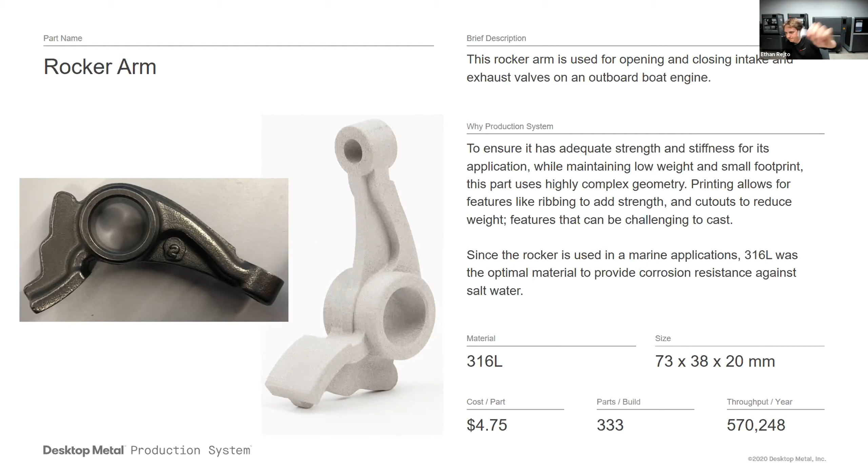Another part here is the stator. It's used in a small electric motor. It's very difficult to justify the tooling on this geometry because it wasn't needed in that high of volumes. But in just one run on the production system, you could run all of the needed parts for this application, and it just costs $4.48 per part. You can do over 274 of these parts per build, over 400,000 parts per year.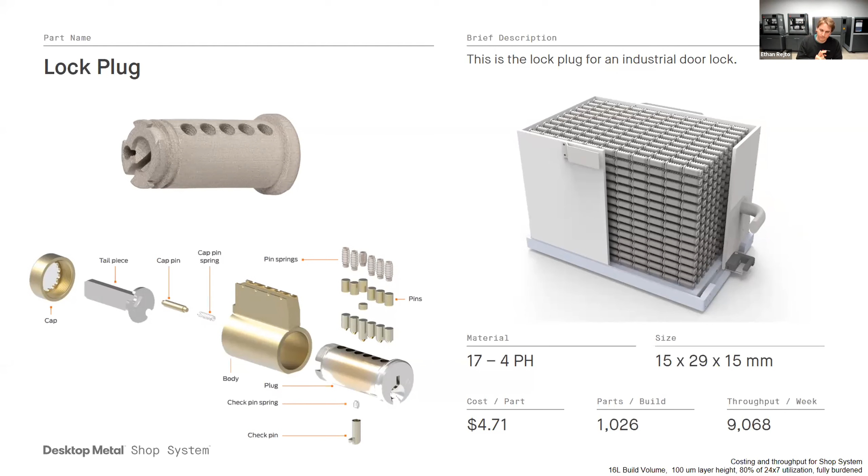I'm going to go through a lot of examples here, but hopefully I'm convincing you that binder jetting really is an alternative for high volume production, to produce these parts at a low cost per part, at a high throughput per week, or even per day.

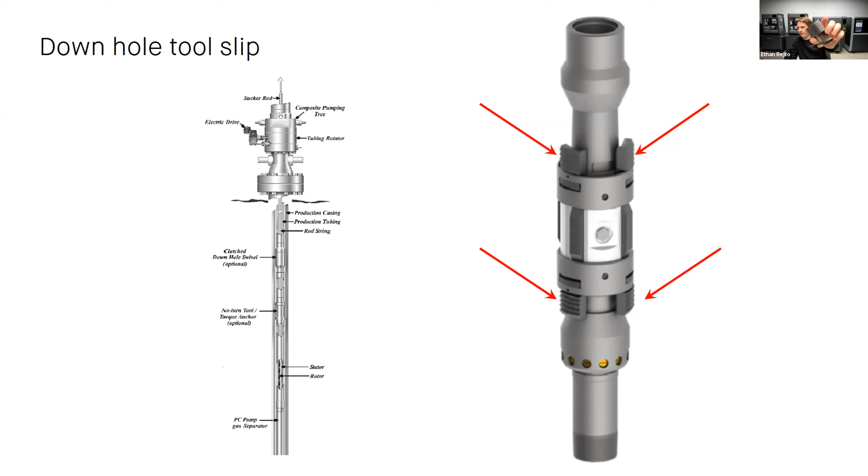The next geometry are these downhole tool slips. These are parts used in an oil and gas environment. There are actually a couple different geometries of this part that we're going to look at. They have some patent work going on, a lot of innovation on these parts. So they really wanted to stay very agile with this part, be able to alter the design on demand, and not tie themselves down to some cast tooling.

This is actually used for holding a frictional hold between a packer and a pre-existing pipe that's been drilled, used for oil extraction. I have a couple of different versions of it here. It's actually a consumable, so this part is lost after pumping is complete, so keeping the price down was very important. You can see another version here, this one actually has two sliding components that are sliding within each other on this geometry. These parts were printed as-is, still allowing for that movement, so keeping the price low was very important. We're able to produce these parts on the Shop System, this binder jetting machine you can see over my shoulder here.

The big win here was this flexibility. They can very easily change the geometry, very easily alter what this part looks like to allow for it to be high performance in different pumping scenarios. All they have to do is modify the CAD model, load it on the printer, and in a few days they can have all the parts they need for whatever pumping scenario they're in. Cost of this part is just $87 per part. They can do 26 of these per build, over 200 of these per week, really allowing them to be agile while still keeping the cost low and the volume high.

On top of that, when you're moving to high volume with 3D printing, we're opening up new design freedoms that weren't possible with casting. Original designs are often very generic and blocky, bending to the will of the manufacturing environment rather than being optimized. But with additive manufacturing, we can throw a lot of these design rules out the window.

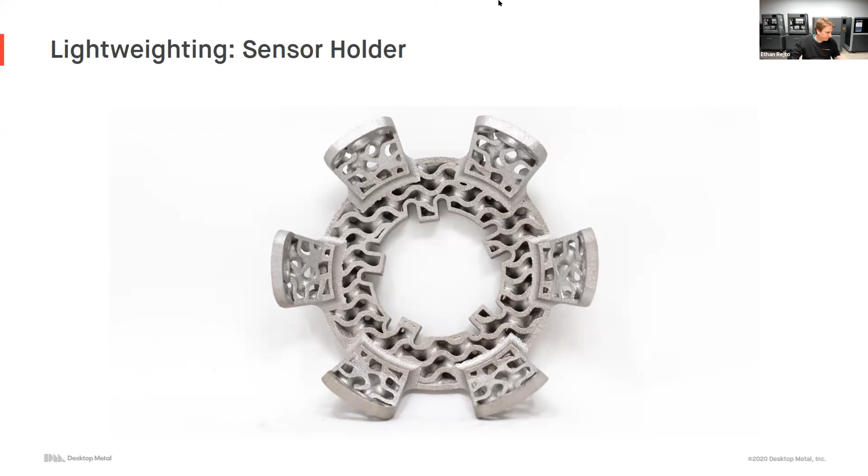Another example of this is this lightweighted sensor holder you're seeing here. After we finish the design, we think about how to reduce mass in this part in a beneficial way — to make it easier and less expensive to print, and also to lightweight the geometry. These are all features that would be impossible to do with casting or traditional manufacturing methods, but are very easy for us to print.

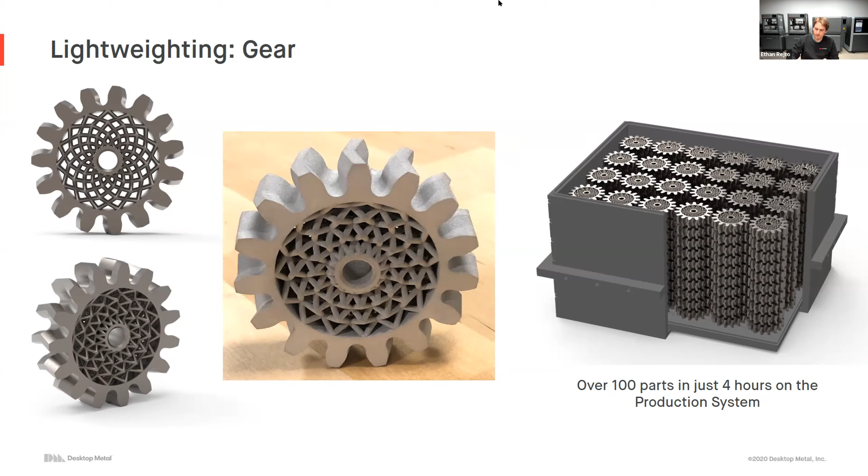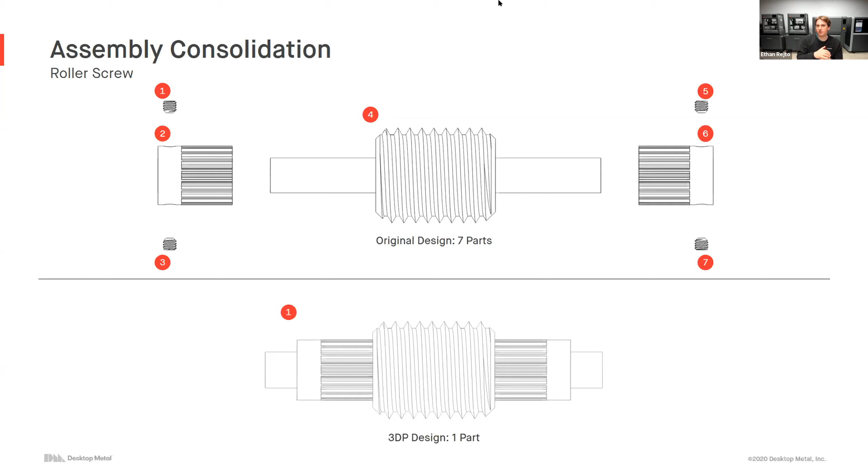But with 3D printing, we can consolidate that entire assembly into just one part and print it as one simplified design. Of course, now we're not just talking about producing one of these parts — we can print hundreds of these parts at the same time on the shop system.

Another example is mass customization. We're not tied to any tooling now, or to any set process — at any point in time, we can make changes to our design. So if one customer wants one design and another wants a different design, all I have to do is make changes to my model, upload it to the printer, and I can be very customized to make sure I'm doing exactly what my end customer wants, because we're not tied to any tooling. All I have to do is make changes to my CAD model, load it on the printer, and in a few days I can have however many parts my customer needs.

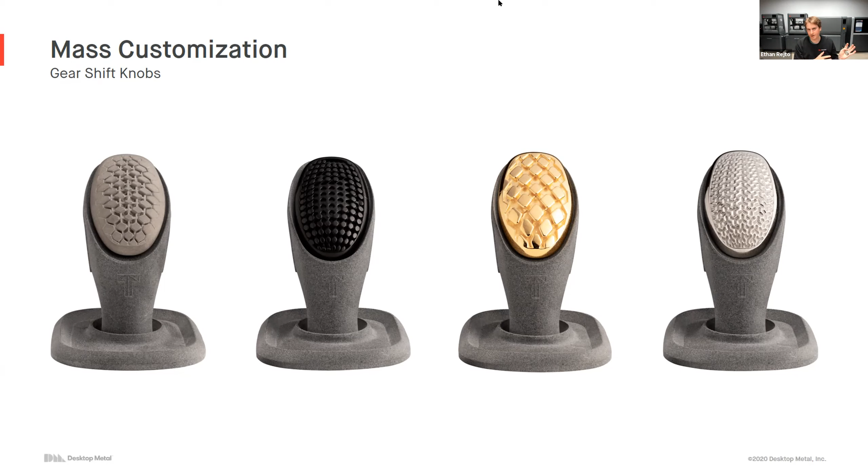This is an example of a gear shift knob, which goes on your car's gear shift. It can be mass customized with different textures depending on what the customer wants or whatever design they choose. And then I can actually mass produce these parts via binder jetting thanks to the shop system.

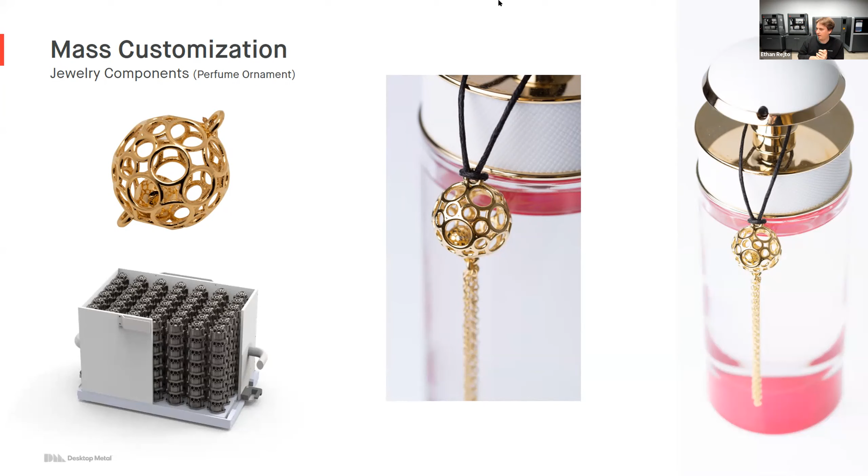This also has lots of benefits in the jewelry industry. You can see a couple of different jewelry designs here, including a perfume ornament to really spice up a perfume bottle. Again, lots of design flexibility, lots of customization possible to allow me to really customize that design and then print them without the need for any tooling.

A couple more examples here of some jewelry parts. Really nice organic geometries that would be impossible to produce with traditional manufacturing methods, but now I can design whatever I want and print those parts. And these parts, of course, have all been plated after printing, electroplated.

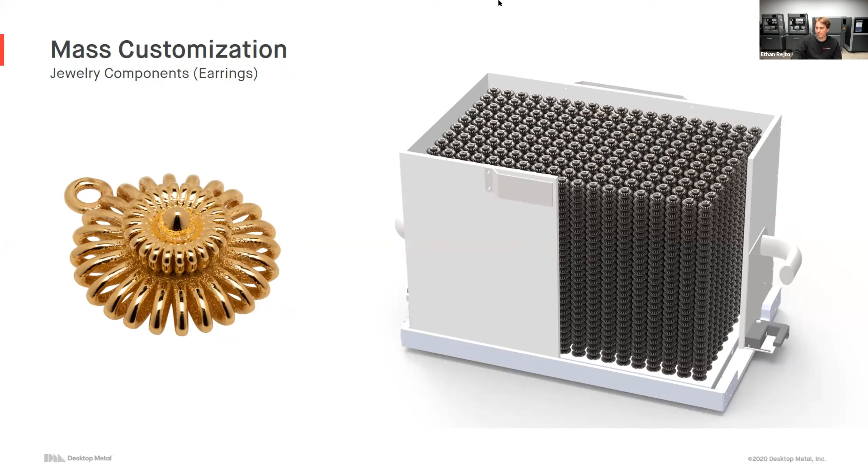You can see, again, we're really moving to high volume too. We're not just talking about producing one of these like you would maybe with a wax process with some wax 3D printers, where you would print your wax then do investment casting. Now I can print hundreds of these parts, thousands of these parts at once, to allow me to actually move to high volume with these nicely customized geometries.

But how do these parts actually perform? Hopefully by this time I've convinced you that metal 3D printing adds value both when prototyping and for pilot runs, to help complement your traditional casting methods. I hope I've convinced you that for some geometries and volumes, it's a very cost competitive process for actually replacing casting. But a lot of you are probably asking, how do these parts perform? How do I know these parts are going to perform the way I need them to, to actually replace their cast counterparts?

Sintered parts are composed of dense, polymer-free metal. This is very important. After the sintering process, there is no history that the part was ever powdered metal. It's been completely erased because we're able to raise that part slowly to its sintering temperature, where we're actually able to have some grain growth. The grains have now grown larger than the original powdered metal particles were, and there's really no history that the part was ever powdered metal.

It also has this homogeneous microstructure that allows the parts to be isotropic, where they have equal strength in all directions. 3D printed parts have this notorious stigma for being weaker in Z than they are in X and Y, but this is not true of sintered parts. Because we're sintering our parts, we're bringing the whole geometry up to its sintering temperature, allowing it to fuse in all directions, allowing it to be isotropically strong. It's this homogeneous microstructure and this isotropic part properties that make these parts very, very attractive for industrial applications.

Our material properties really meet or exceed those standards set out by ASTM or MPIF standards. Looking at a 17-4 stainless steel material, you're seeing a yield strength directly out of the furnace of over 650, 660 megapascals. Of course, the parts can still be heat treated if you want, and you'll get over 980 megapascals with that process. So you're still seeing these excellent material properties that you would need for these very industrial applications.

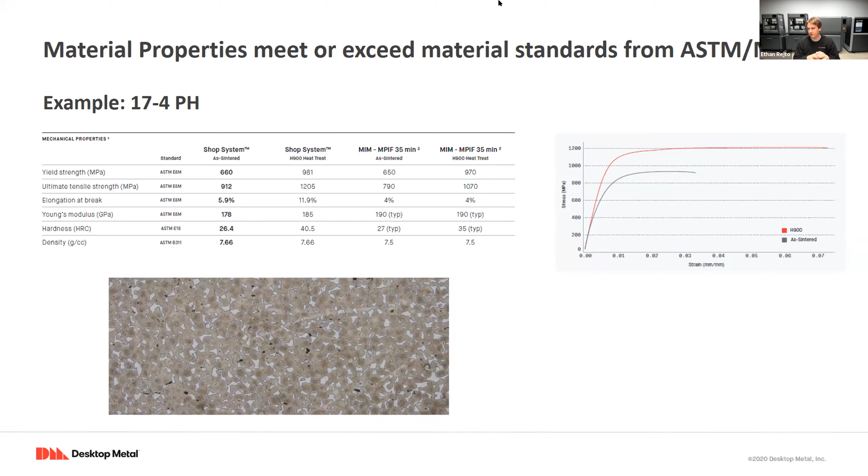Looking at density on the Studio System, the material density is really dependent on the actual material. For some of the carbon steels, we're seeing about 90, 94, 93.5%, and looking to increase that constantly. But when it comes to 17-4 PH, which is the first material we released on the Studio System, we're now consistently seeing over 98% dense, the density you really need for your prototypes and replacement parts.

When it comes to the Shop System and our binder jetting machines in 17-4 stainless steel, we're seeing densities of 98% and higher consistently, giving you those really high densities you need for end use applications, for parts that are going to be out in the field.

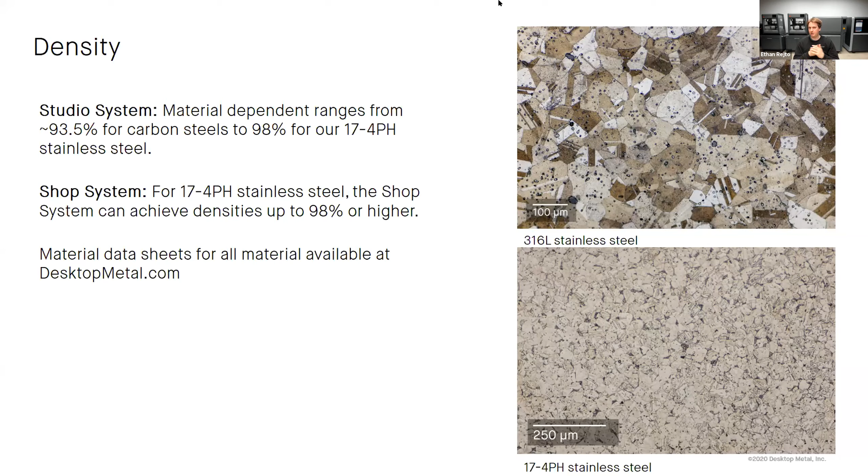After looking at the testing results, you can see that the cast part was able to withstand 350 inch-pounds and the binder jet part was able to withstand 429 inch-pounds. So it really exceeded the properties of what the cast alternative was able to do.

When it came to fatigue and cycling, the cast part was able to withstand these million cycles, but it had lots of deformation after the process was complete. When it came to the binder jet part, it passed, but there was very little to no deformation of the part afterwards, allowing it to have withstood far more cycles than 1 million.

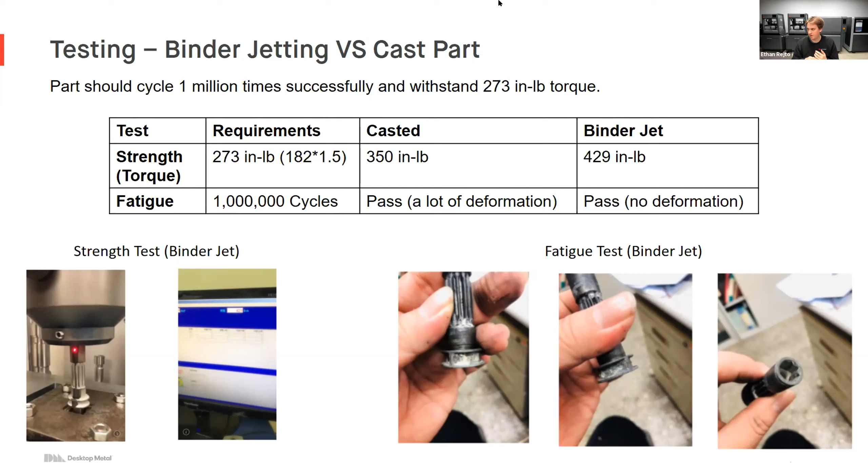So just a quick example of a part geometry directly compared to the casting alternative, showing that it meets or exceeds those properties that are needed for your replacement parts in the casting industry. That's all I have today.